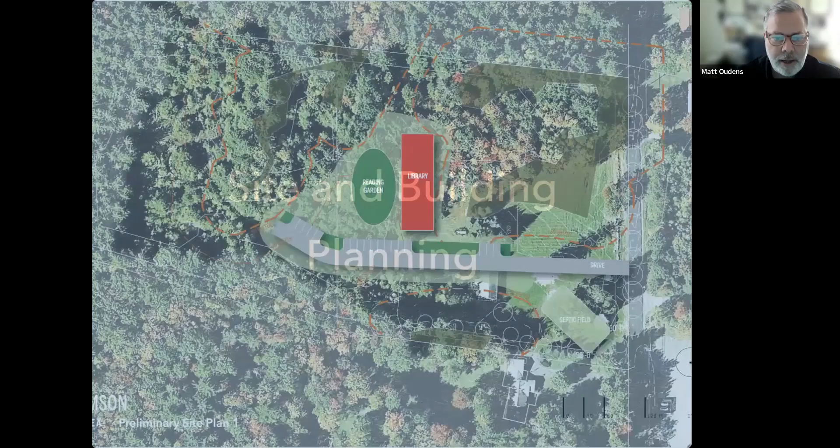As you both probably know, there are pretty extensive wetlands on the site. So the orange dashed line, the heavy dashed line, is the 50-foot buffer for the wetlands. We're trying to kind of thread the driveway and parking through that buffer. We have both east and west wetlands. So we're coming in using the existing entrance from Leverett Road with a new driveway that comes straight back with single loaded parking along it.

And the question from our standpoint really was about getting fire trucks back out once they're on the site, so we wanted to get a sense from the fire chief about what the preference is. The building in this location is about 350 feet back from the road - is that right, Dominic, roughly? That's right, yep. So it's a straight shot. In some jurisdictions the fire department has been willing to pull in and back out, but we wanted to hear from you guys what your thoughts are in terms of site access.

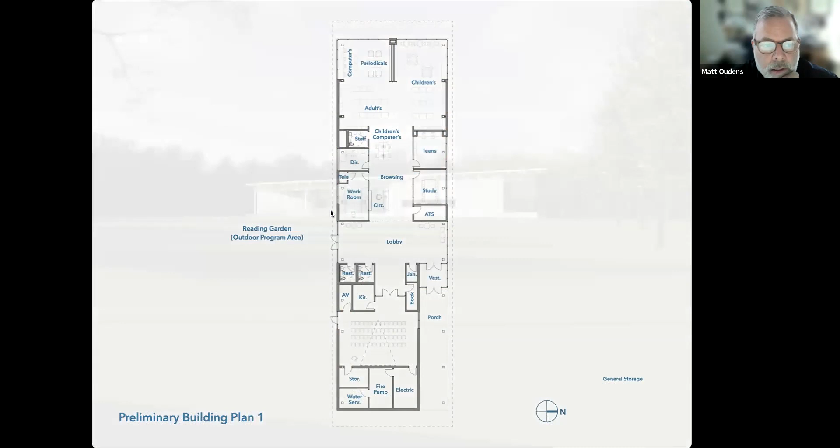That's also if we go with this scheme. We've got two other layouts, Matt - should we just quickly look at those? I don't know if we need to roll that far through. They're not going to be much shorter, maybe 100 feet shorter, but it's still - they're all kind of the same, you'll see them as we go through. If you want to flip to the other two, we can. Just get out of full screen mode and skip to that slide. There you go.

So if backing out is not acceptable, and we totally understand that, we need to come up with a solution that works for you guys in terms of how we turn a truck around. What we were hoping to avoid is a full turnaround, like a paved roundabout, a circle that allows you to fully do a forward loop and exit back out with the fire truck, just because it takes up so much room and means a lot of tree clearing. So alternatively, we could do a K-turn at the end of the drive, so you'd have to do a K-turn to get the truck out. We could also do something with reinforced turf - we've talked about a clear area that's lawn, but reinforced so it could support the weight of a fire truck. The challenge there is maintaining that during the winter.

So I guess we just want some feedback from you in terms of what you would like to see here. Would you guys be willing to do a K-turn at the end of the drive?

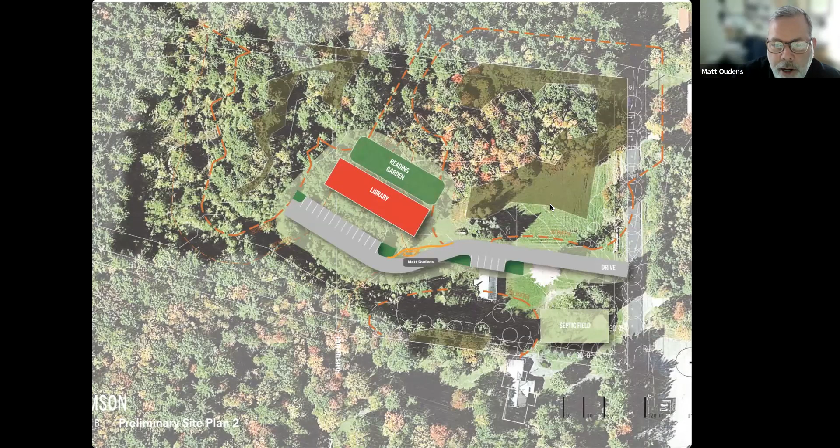So if we had, let's say, a drop off here, where anybody, patrons, whatever, could pull a car off, drop off to allow entry into the building. But that would also give a spot for a fire truck to pull over, which gives a little more room then to get another truck be able to get past in either direction. Would that be acceptable?

Yeah, that would work for me, in my mind. Okay, that way you can have one truck at the scene, one truck can pull in, turn, either go to the very end of the driveway and turn around and head out. That's pretty much what I'm thinking. That's kind of what has to happen.

Okay. And then in terms of at the end of the drive, what we've done in other jurisdictions, what I was describing is basically having a kind of hammerhead at the end. So a truck would pull in and then exit.

Hammerhead, I'm not following. Do you see the yellow I drew? Okay, yeah, basically enough to turn around there.

The alternative is that we're drawing a paved turnaround that's quite large to accommodate a turning radius for a fire truck, so it just takes up a lot of space. And actually you can see here that what I've drawn there is fully in the wetland, so we would have to figure out a way to do that kind of out here, somehow outside of the wetland buffer.

I'm certainly not trying to speak out of turn, Lenny, but I feel like if we're going to have one exit and entry point, even though there would be room around it, that straightaway looks more workable than the other. I wondered if there wasn't a point off the road where you could put an area for that truck to back up into and turn out.

I'm just looking at a straightaway with cars parked in the parking areas, and in that picture, I don't see any place to turn a truck around. I completely agree the space needs to be widened if we can, but as far as pulling trucks in and out, I like the straightaway better.

I'm certainly not trying to speak out of turn. I don't operate a fire truck, nor do I want to, but I've seen what these guys can do—they're really good at what they do in driving. So I do think there needs to be more space to maneuver around in that parking structure across from the buildings.

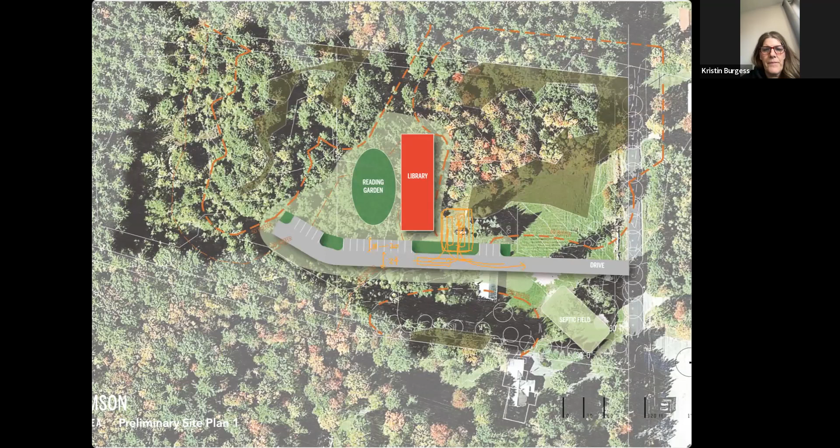Does that make sense? Yeah, so the parking stalls themselves are in the range of 18 to 20 feet deep standard, 9 feet wide, and the drive aisles should be about 24 feet wide. But so if cars are parked there, obviously you've only got 24 feet to work with.

I guess the question is what is this surface that we're driving on? Because it needs to be maintained during the winter, correct? It would need to be plowed. So it might need to be something other than reinforced turf if it's got to be maintained in the winter.

We'll have to review that with our landscape architect to see what they suggest, but it's possible we end up with something that's paved - maybe permeable pavers as opposed to asphalt. We can look at other options because I think we want to avoid asphalt, especially on both sides of the library. We don't want a library surrounded by asphalt. So we'll need to think about what that surface is.

But it sounds like, Lenny, you're saying you'd like to get a fire truck on both sides of this building? Well, I just kind of floated that as an option. I just don't know if you made that area wide enough for 2 fire trucks to park side by side - in real life that's just not going to work to be able to turn around. For 1 truck to turn around, they're going to be too tight together, unless it's really huge.

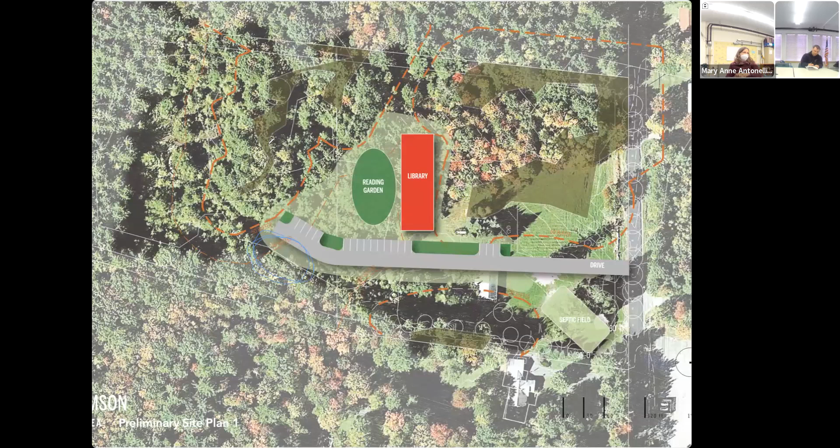But doesn't this also all depend on the orientation of the building? Yeah, and that has yet to be decided. So if you rotate the library and have it in that orientation that many people said last time they liked from the road, that might change the way that you access that space.

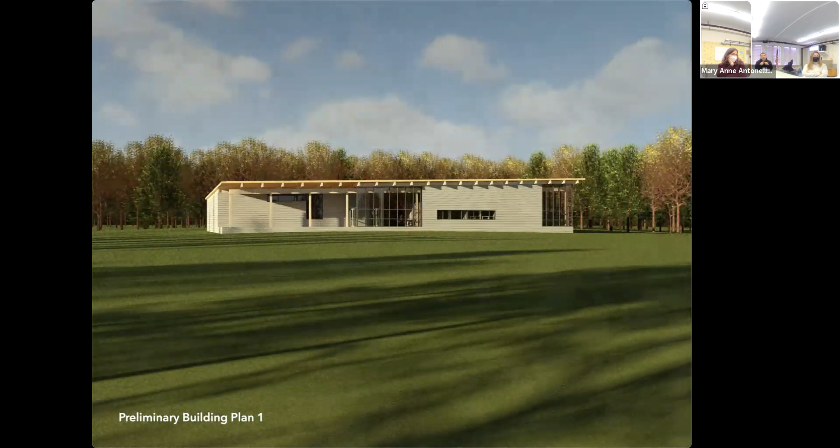As long as one truck can park next to the library and the other truck can pull in and then turn around easily and leave, that's pretty much all I want. And it looks big in these pictures, but it's really going to be like a big house, not like the elementary school.

I'm just wondering, why is the parking lot so far from the road? This is the way it's coming out? It's because the building has to be that far back from the road.

Just wondering, because if the parking lot was closer to the road, we could even get away with doing the work from the road like we would with the other library. Yeah, and it has to be that far back, because that dark green area, that's like a U shape - that's all wetlands, so we have to avoid that.

So Lily, I don't know if you've been hearing much of this, but I don't know if you have any thoughts from your perspective in terms of how we might manage some of this stuff.

It sounds like there are kind of 2 options. One is providing a paved turnaround at the end of parking somewhere - in this case, east of the end of the parking lot, outside of the buffer - presumably just a paved asphalt turnaround of sufficient radius to accommodate a truck of roughly 60 feet. Alternatively, we provide a couple of places for a truck to park and or back out, doing a kind of K-turn, which suggests maybe a different kind of paving.

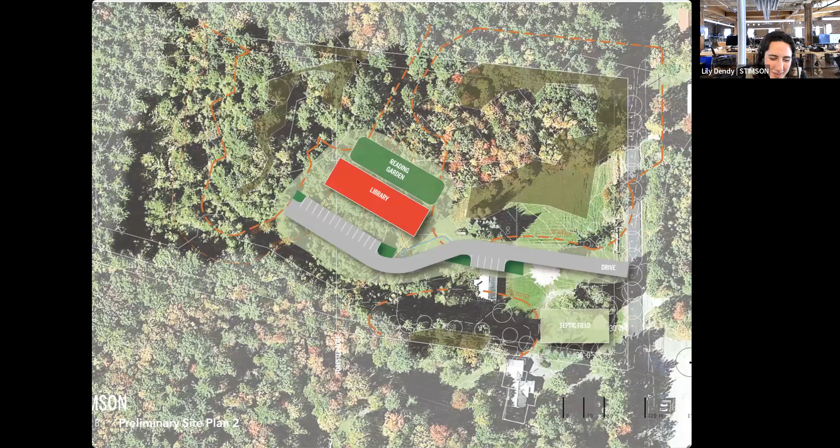It's snow that's the bigger question, because we'll have to keep it clear of snow, right? Lily, I don't know what your experience is with that. Is there a way to keep clear a reinforced turf area in the winter? I don't actually know, but I have a feeling Greg has a good understanding. I'll ask him. We're going to talk after this meeting.

So I think in the case of what Dominik drew there as a kind of lay-by, to me that makes more sense to do as asphalt and incorporate that into whatever scheme as a drop off for the library for patrons, and then have that available for kind of dedicated fire truck space in the event of an emergency. Chances are no cars are going to be able to park there, so it would be unlikely that there's a car there when an emergency vehicle is coming in.

And then in terms of exiting, I'm wondering if maybe rather than just a loop at the end, there's a way to have kind of a longer drive lane - I'm trying to draw it, this is not a very good drawing, but you get the general idea. Basically you're creating a longer loop out this way, Lily, if that makes sense. And then I'm thinking in the middle we could use that landscaped area - sorry, this is terrible, let me try again. We could use the area between that sort of loop drive and this area here as a bioretention area potentially.

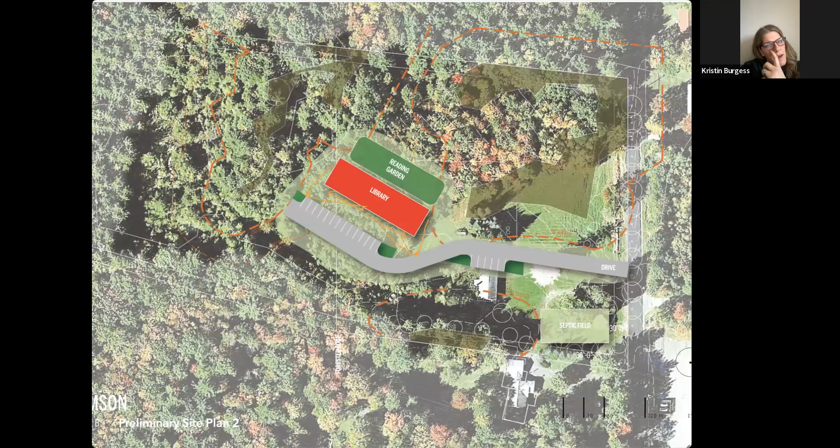Well, if I'm looking at the layout right now, I believe that the exterior building mounted cameras might catch certain things in the parking lot. I'm not as concerned about the parking lot. People that are coming there for true and positive reason are going to be careful with each other. And I believe the residents of Shutesbury are really good about, if they accidentally do something to someone else's property, to come forward. I'm mostly concerned of after hours, and people there for nefarious reasons. So I don't necessarily think that the pole mounted is necessary in regards to the parking lot. Of course, I yield to Mary Anne on that as well. I think that the building mounted cameras would be sufficient.

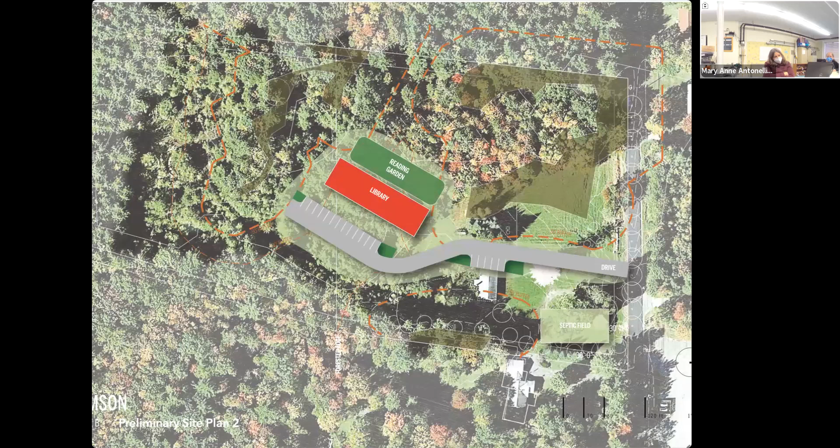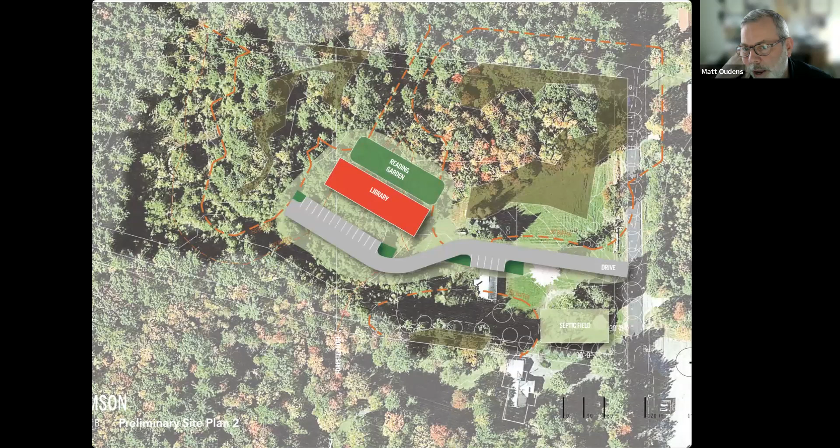So what do you think, Matt? I mean, generally speaking, we're trying to provide panic buttons usually where staff can access them and not the public. And that's why they tend to be at the circ desk, because there's usually somebody at the circ desk or close enough in terms of staff that it's easily accessible. If we were to locate them at the two ends of the building, then it's a little bit more complicated in terms of keeping them away from the public, but still easily accessed by staff.

Right, so maybe in the kitchenette, which I'm not saying would be closed off to the public, but would be mostly a staff location.

I just think maybe we could find a place to tuck one away at the other end. And if we can't, then, because we don't want people accidentally or intentionally hitting it. I could just tell myself that this is not going to be that big a building, and we're talking about moving 200 feet. So maybe the one. Yes, okay, we can have it just at the circ desk.

If we were to get two, I would say the conference room and the circ desk are the two most important spots. The conference room because when it's going to be utilized for conference purposes, you're going to have a large number of people in there. It is an area that if, God forbid, the library is taken over by someone who wants to do harm to a number of people, that is going to be the area that they will be enclosed in. So if we had two, those would be my spots.

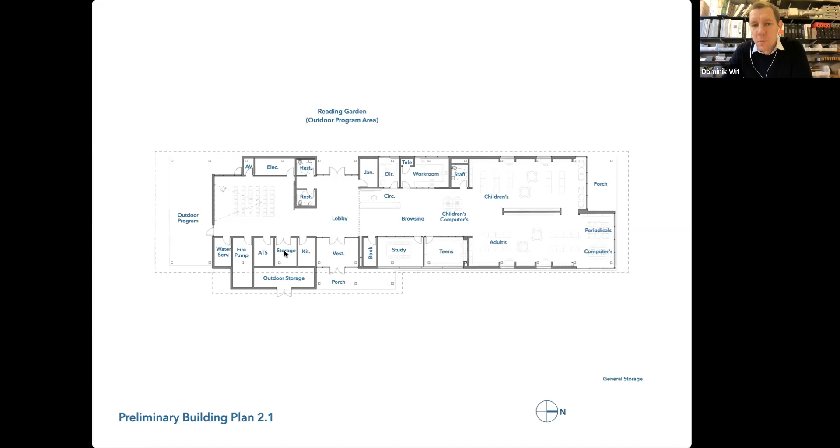The only reason is that anybody could just do it, so teenagers... we're probably not gonna have a lot of teenager shenanigans, but these things are always for that thing that you can't really plan for, and that is a rare occurrence anyway, but we live in a world where things do happen.

I do think having a staff member... you may not have a staff member in the room at that time. And if they're the only ones who know where it is - I'm a former high school teacher, so I've been through a lot of training, definitely not as much as you, Kristin - I just think of everything I had to think of to keep everyone as safe as possible, and the last thing I want to do is open a door when you're trying to get everybody out, to save as many lives, rather than trying to get into a room and push a button.

So I would just think about that a little bit more and see, when you're in that scenario, what would be the easiest way of calling. Behind the screen, or... the television, if there's all that.

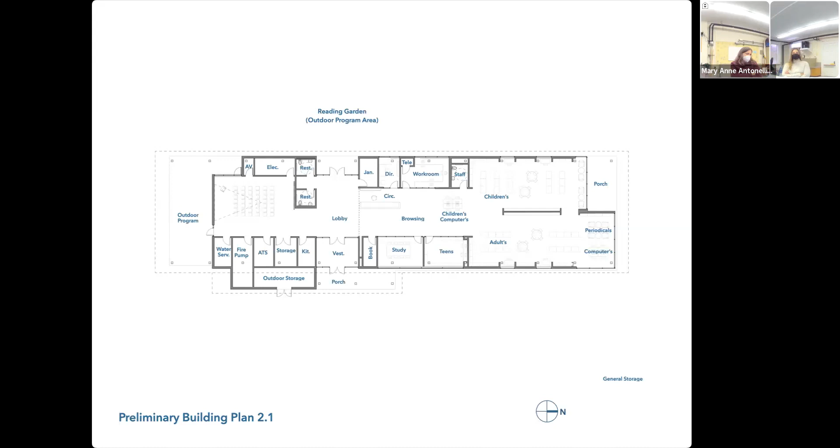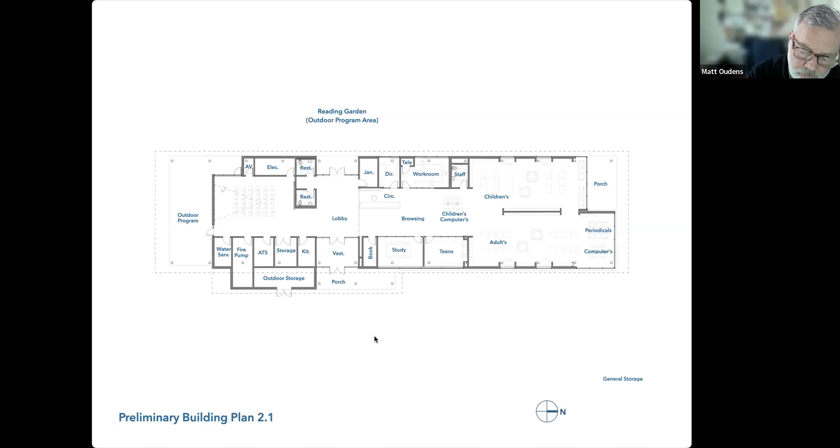Are you asking for procurement reasons, Neil? Yeah, more so, is this something we need to look at as proprietary? Or is this something that we're gonna purchase by state contract? And if by state contract, Matt needs to understand that we're providing pathway and infrastructure only. I'll see if they're on state contract.

So I don't think that we need to reinvent necessarily what we currently have. I know we've had problems with our Citizens Security in the past, and I know that Becky gets frustrated with them as well. But it only makes sense that if we have them for all the other buildings in town, including the school, that we would also have them for the library. I don't think we're trying to reinvent the panic button.

The camera situation - I know the school is looking into procuring cameras as well. Believe it or not, they don't have any currently, so we've been working on that. I'm not sure what they're planning to use. But as far as the panic alarms, as far as the building alarms, I'm going to agree with Mary Anne here. I think that we'll use citizens, and whatever panic system we have now works fine - we just need to put it in the right spot.

And is Citizens Security a monitoring company? It is. So each building - they don't physically do the install, they're just monitoring the signal? Oh no, they will do the install, yes, they will come out and install the security needs.

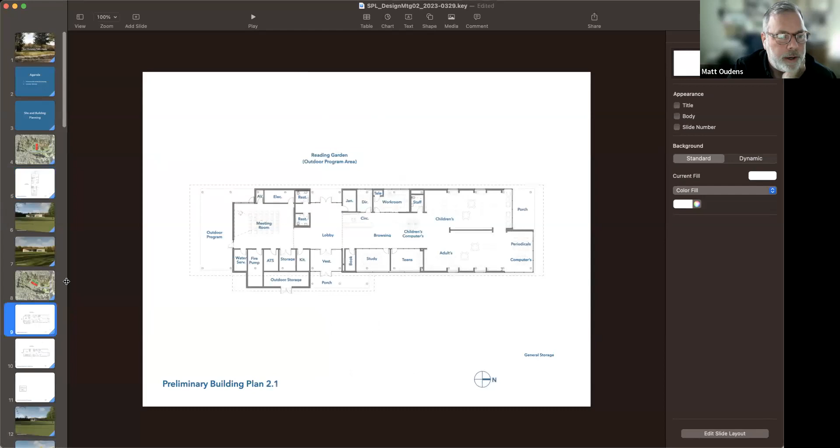Matt, are you still considering an attic space over part of the building for mechanical? We think that above the staff offices, the teen room, study room, some of those smaller spaces, we can create sufficient plenum space to locate mechanical equipment. Similarly, we might be able to get an ERV for the meeting room located above, say, the restrooms or the storage room and kitchen. So there are a couple of areas where I think we'll be able to get decent plenum space above to hide equipment.

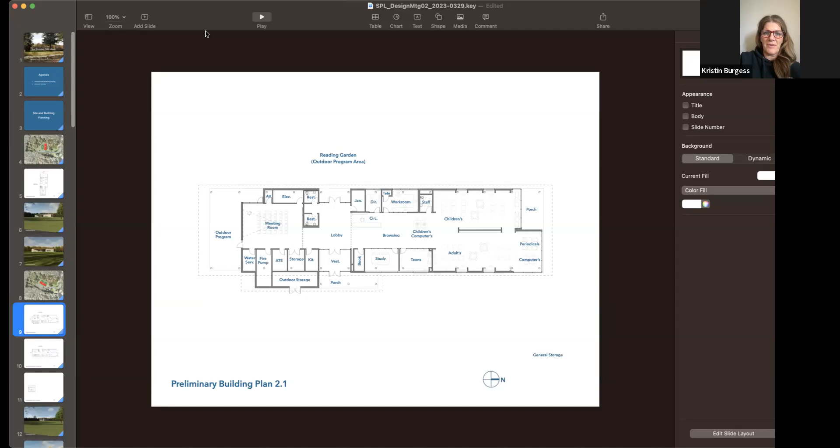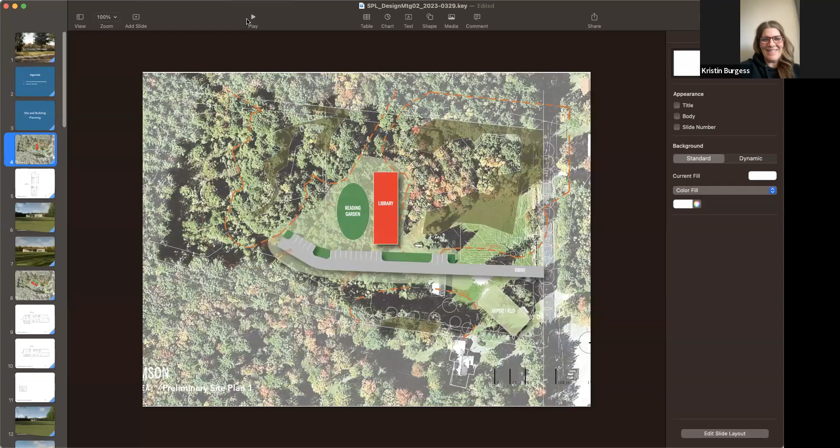Dominik, do you want to run through the plans as they stand today? Yeah, will do. I'm sorry, does anyone mind? I have something else I have to run into, is it okay if I'm excused? Yes, thank you so much, Kristin. It was really nice to be here. Thank you, Kristin. If you would send me anything in an email that you're showing after I leave, that'd be great. Marianne has my email. Yes, great, okay, thanks, Kristin.

That was really helpful, that discussion. Some of these images you've already seen. We've got 3 schemes that we wanted to review with you guys and go over the development of them. This is the first scheme where we orientate the building east-west on the site, and we're currently showing one option for parking. This allows for more direct access, breaks up some of the parking stalls, and introduces an option to incorporate some plantings and enhance the entry experience. The reading garden is located to the south of the building, and again we're considering the 50-foot buffers and trying to allow the building to have some address to Leverett Road to the north.

As we go to the next slide, we have a plan that's been revised slightly from what we've seen last week. It still has an entry porch on this side here to a vestibule and a central lobby. Dominik, we're still not seeing the site plan. Got it, there you go. Something with the play seems to not register. Can you all see that now? Yes. So with this plan, entry is through this overhead covered porch into a vestibule.

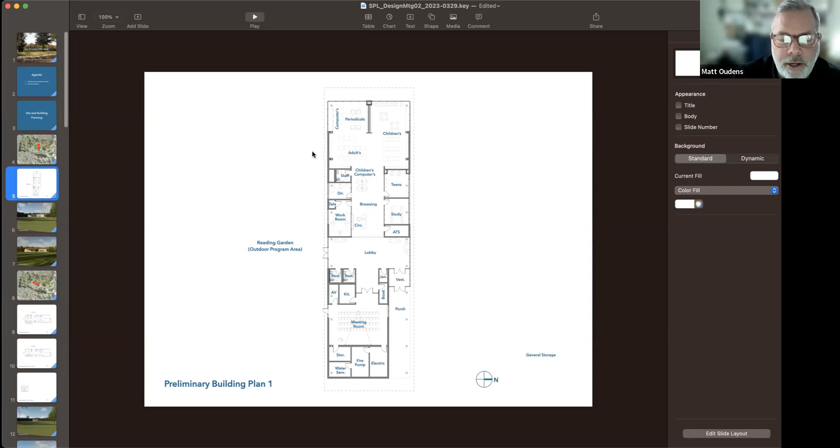Hey Dominik, I think we're not seeing it in full screen mode, so your cursor is kind of misaligned. Got it. I think I'll just stay in this - if that's okay with everybody, is this a lot easier for everybody to see? I was able to zoom in now. Does this work, Matt? Yep.

So I'm just highlighting this mechanical space here. Apologies for this. Here we have the meeting storage room. We have water service fire pump, which needs exterior access or needs to be on an exterior wall. We have the electric room as well. Then the kitchen, AV rooms, and the book drop create this threshold for the meeting room. We've located the public restrooms in this lobby.

Access to the book drop room, which needs an exterior wall, and then we have a janitor's closet. So we did follow up with our code consultant as to the requirement for restrooms.

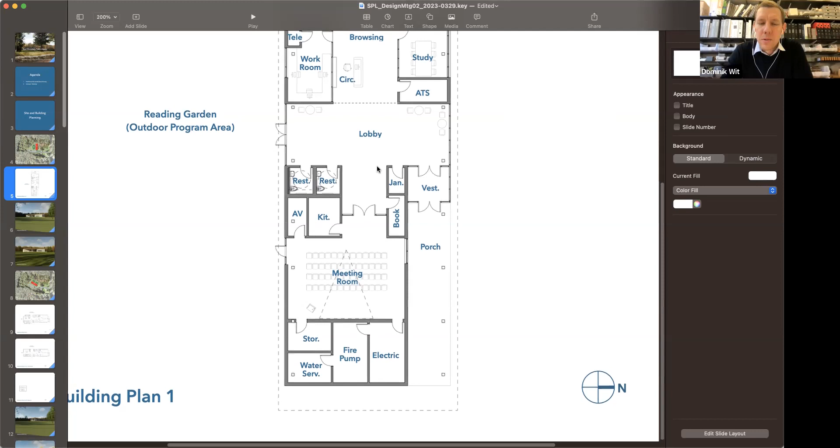If we had less than 100 patrons, we would not need a third restroom. But following our discussions at the last meeting, we've included a staff/family room—it can be considered for staff and patrons—allowing for a third restroom, which we've included in all three schemes. I wanted to note that as I'm talking about these two gender neutral restrooms here in the lobby.

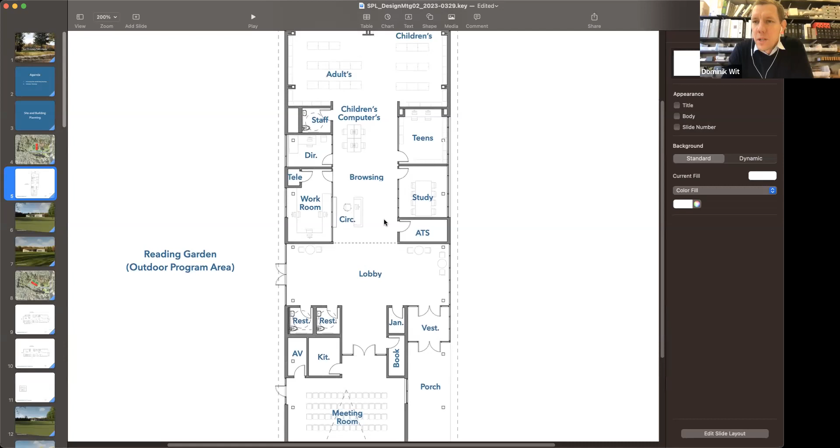Marianne, feel free to jump in as I'm presenting if you have a question.

I think the likelihood that we would have 100 people in this building at any one time, that's going to be rare. Before the pandemic, we would have 30 to 40 people come through a day. Programming would be happening in this building, and we might have 50 people on a somewhat regular basis, but to have 100 people in the building on a somewhat regular basis, I think that's not a reasonable expectation.

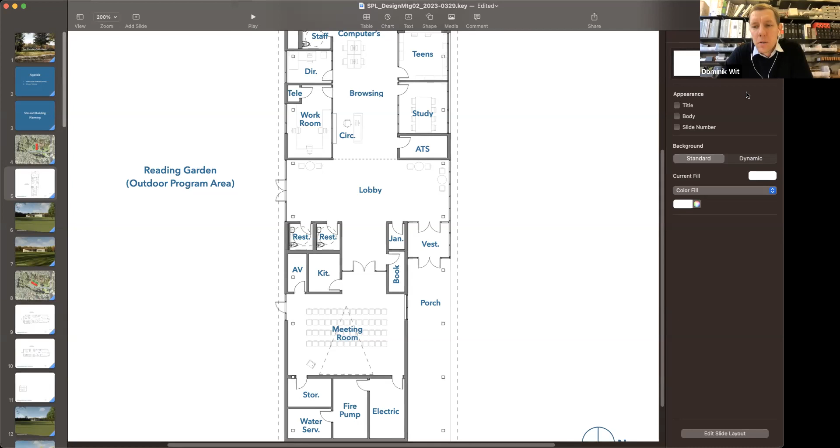So if we said that we were going to have 75 people, do we have to have that third restroom? We would not. But I think that would require sign off from the local official, Marianne.

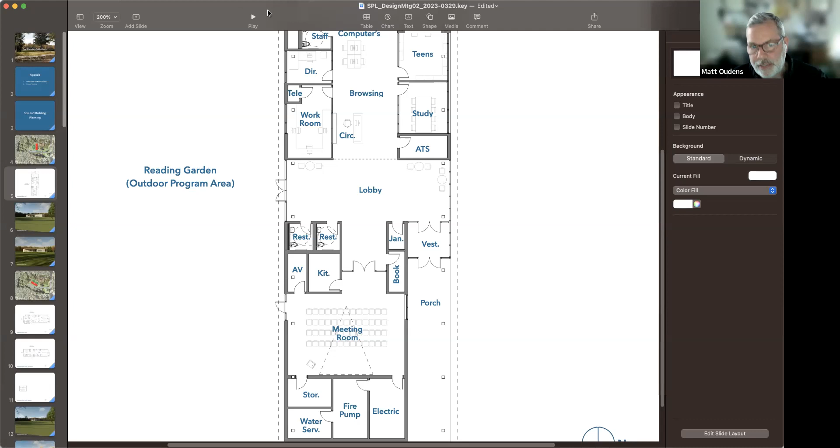I think you would probably have to do something like either post maximum occupancy in the building or sign an MOU with the local authority, basically saying that the occupant load would never exceed that capacity, because otherwise, if you do it based on building area, you're going to exceed 100 people very quickly.

We were basing occupant load for fixture count on seating. If you have a 50-person event and other people in the building, and you count up the total seats, that's generally how we

estimate fixtures. I understand what you're saying, but I think it's conceivable, although you're saying it's unlikely, that you would have more people. So I think we would just need to get sign off from the building inspector that that's an acceptable interpretation.

And I don't think we can base anticipated building use on the use that you have in the past. No, but this is a town of 1,800 people. The Irving Library just had a day when 100 people came into the library, but they weren't all there at once. I think we'll have days when 100 people are there all at once, but those are going to be the rare occasion.

What's the capacity of the meeting room? It's 50. Are you taking into account, like, if the bookcases were bolted to the floor, would that lower the occupancy? Or are you taking the occupancy with all the bookcases for the books or without it?

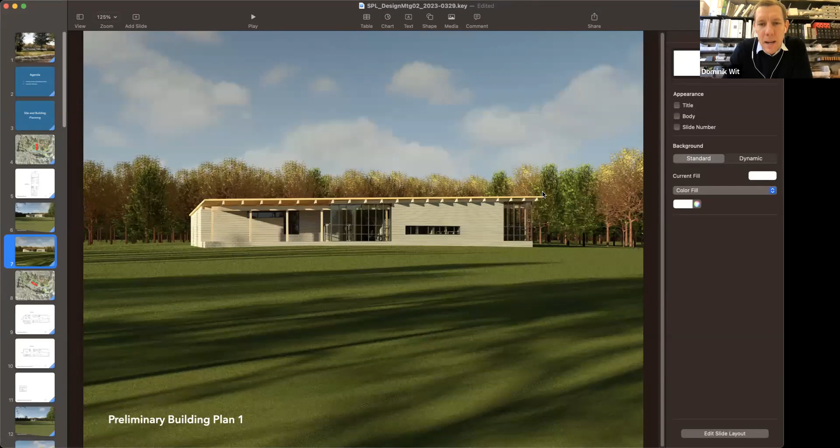Again, similar to the previous view, a bit of a different angle. It highlights the roof angle, which we have to allow for PV, maximum exposure of photovoltaics on roof. And the one thing to point out, the grading obviously needs to be adjusted in the model, but right now that porch is sitting up above grade, but actually that would sit right at grade.

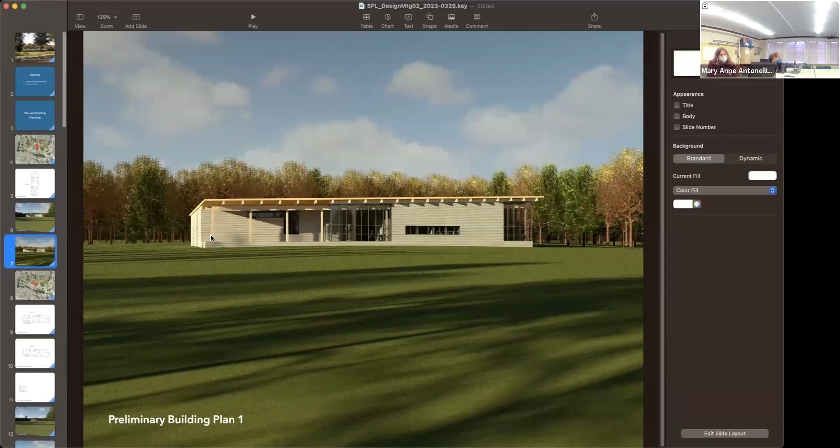Right. And can you tell me the dimensions of the porch? Currently, we are looking at 45 feet that way, and then how wide? 12 feet. Well, yeah, okay.

So one thing related to that to mention, I mentioned earlier that we are looking into the possibility of a small basement for mechanical space, and we want to price that as an option at a schematic level, probably for whatever scheme we end up pursuing. But taking this one as an example, if we were to create a basement, that whole end of the building at the bottom of the page could go down into a basement, which would shorten the length of that porch by a bay.

So what is that, 15 feet, Dominik? I don't know. That's correct, so it would shorten the length of the building. It would reduce the exterior envelope, it would reduce roofing, and potentially it would reduce the length of that porch, which I think might be an advantage.

The other thing is we could maybe flip some of the AV and kitchen to the back side of the meeting room so we don't have such a deep threshold between lobby and meeting room, which is a bit of a challenge in this scheme. Mary Ange, I know you're hoping for some connection between the two, and that's difficult to achieve here because of everything happening between the meeting room and the lobby.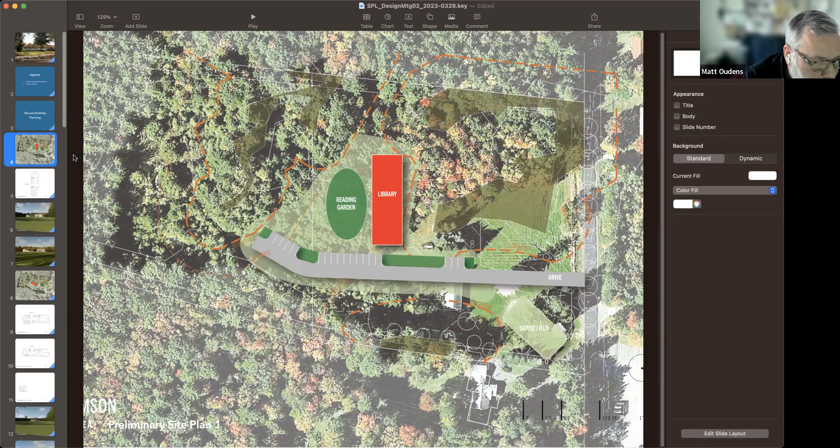Where's our outdoor covered program area? So we don't have that in this scheme. Really the only way to create it, Dominic, if you can go back to the plan, would be to tab out this roof at the end so that we don't need such a deep overhang on the end of the building.

So the roof would sort of be doing this, with a constant slope down to here, and we'd have to support that roof here and here. I think that's probably the only way to do it, unless it's a separate roof structure adjacent to the building, which is another possibility.

We could have that covered outdoor area as a kind of freestanding pavilion, with a canopy connection at the door that gives you cover to get in and out. If we did it this way, we could make it unsprinklered since it wouldn't be attached to the building. But if it's not attached to the building, it's not an eligible cost, so it has to be attached if you want us to pay for it.

So couldn't- yeah, and the porch, that's how we have it in the other two schemes. Couldn't the porch just be bigger? The porch could be bigger, it's almost big enough.

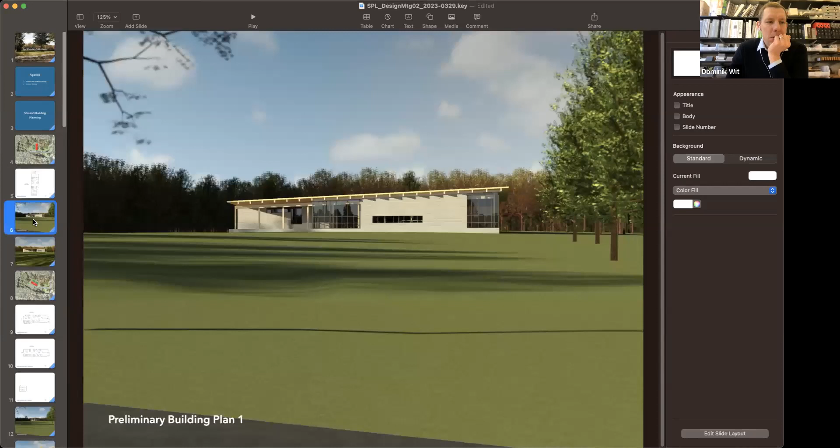So here we wanted to show you two schemes for this. Again, as Matt said, we're considering a basement for all three as that's in play, and we'd like to use this scheme to explore that. This is scheme 2, so it's north-south or at a pivoted angle. Entry is more central to the building with a small uncovered porch. In this scheme we're considering outdoor storage, with direct access to parking or close proximity.

Entry vestibule into the lobby, again with glazed conditions on this plan up and down. You have the meeting room to the left. This threshold condition we're looking at a little differently, and I think what's nice about this scheme is we've allowed for a better relationship between the meeting room and a spill-out space before you go into the meeting room. We've broken up the two restrooms to create more private access - you could consider a drink fountain here - allowing access to these restrooms to be a little more remote from the lobby, not directly off of it.

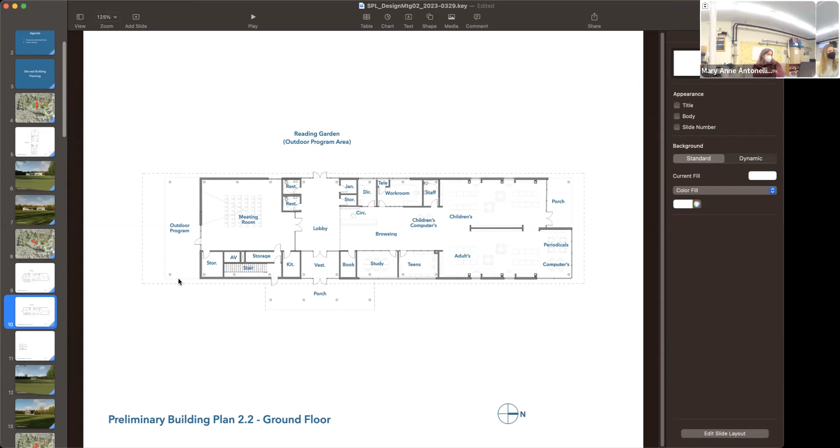This was the scheme with the basement. We can move on to scheme 3 if you'd like.

I think those restrooms are much better, that configuration. And to Stephen's earlier comment, which he's totally right about, the previous lobby provides these little eddies of space that allow for seating, which is harder to imagine this lobby creating, although I think we could make some modifications to allow that. It was a good point to bring up to make sure we're thinking about seating opportunities in the lobby space. We're imagining there will be some mobile book display units in there as well, but we want to think about seating in addition to that.

Oh, that looks fabulous. So this is a view again from Leverett Road. You're seeing the sloping roof picking up on the photovoltaic array there, and here the study vestibule kind of openings within this solid. It's a nice way of controlling light while allowing views through, giving us the perimeter wall shelving. We've incorporated this solid wall, which divides the two programs, left and right, adults and children's, which allows for kind of a porch condition and a nice interplay on this facade.

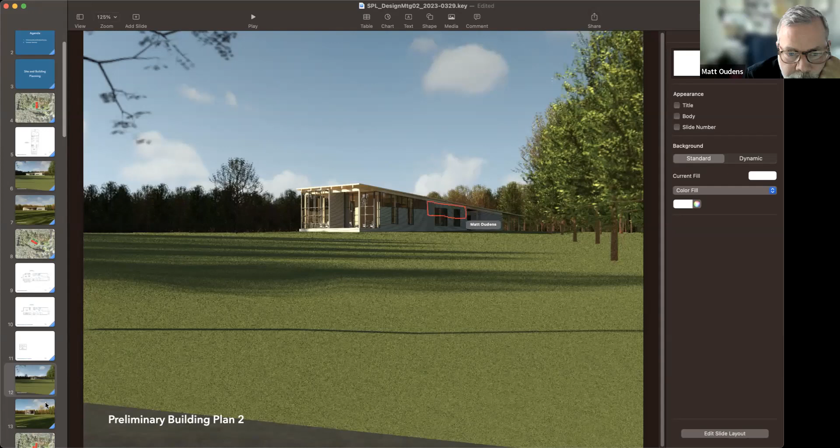So to Lauren's comment earlier, the mechanical space would be here, so these windows would have to be lower. But we're thinking that whole space above that middle zone would be available for mechanical units.

What is that dimension on the height at the highest end? About 18, underside of structure. Much higher than that. I would love to have some figure or something to give scale to this, because it's really hard to understand the scale of it.

This mullion you see here would be around the top of a door condition if we were to have a door. Okay, yeah, that's pretty close, three times.

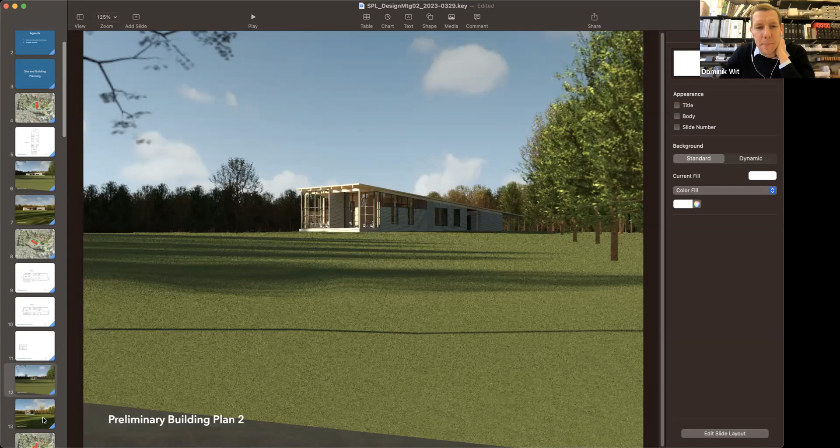This is a view located on the entry drive, or estimated entry drive condition. So again, you would really see through these large reading rooms, adults and children's, and that would be activated, giving a nice presence on the arrival sequence. Again, we have the roof at its tallest condition facing Leverett Road, which I think is nice, both from views from Leverett and the experience to the building. And the views out of these spaces to the meadows is great as well.

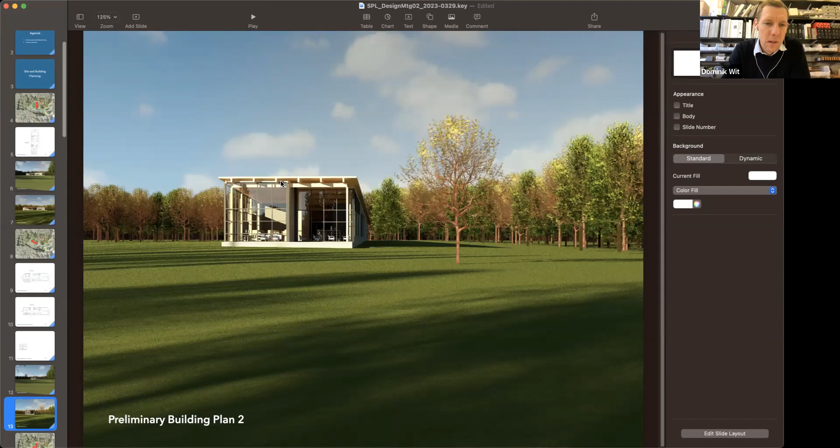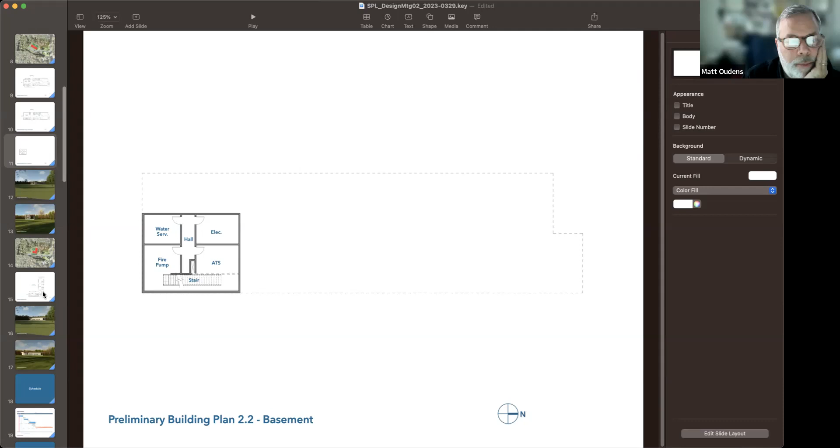We don't know yet if this is worth pursuing. We haven't been able to get into this yet with our cost estimator to get a better sense from him. We had an initial communication with him, and he said that in theory, it's conceivable it would just be a wash, that by reducing the above-ground enclosure and spending a little more on foundations and a small basement, it's about a 1-to-1 trade-off. But we haven't talked to our engineers about it yet, or had a more in-depth conversation with our estimator.

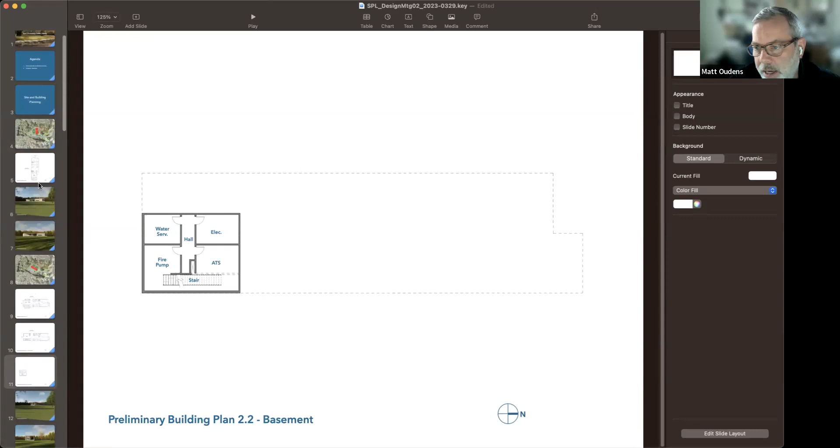I think we're still grappling with the plan. The reason we were thinking about a basement is because it freed up room on the main level to get spaces closer together without all these ancillary spaces getting in the way. We saw that most in that first scheme. It's a little less of a problem in the second scheme, and the third scheme probably has the best relationship between lobby and meeting room, because everything else is side-loaded. So maybe there's a way to manage it, like in this scheme, where it would be a cleaner plan if we could move a lot of that back-of-house stuff down into a basement. But we're still hopeful we can figure out a way to manage it all as slab on grade, and that's something we're still working through in all of them.

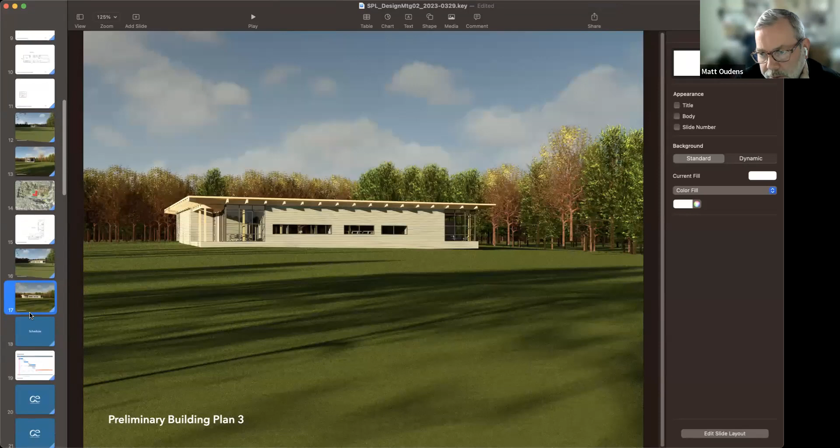Theoretically these are all the same program, but an L-shaped building adds a slightly more complicated foundation, because it's L-shaped instead of just a rectangle. It introduces a valley beam, which adds a bit more structural complexity. Not that it's all that complex, but it's more than just a straight run of structure with roof joists that are all the same. So I think those are really the premiums here.

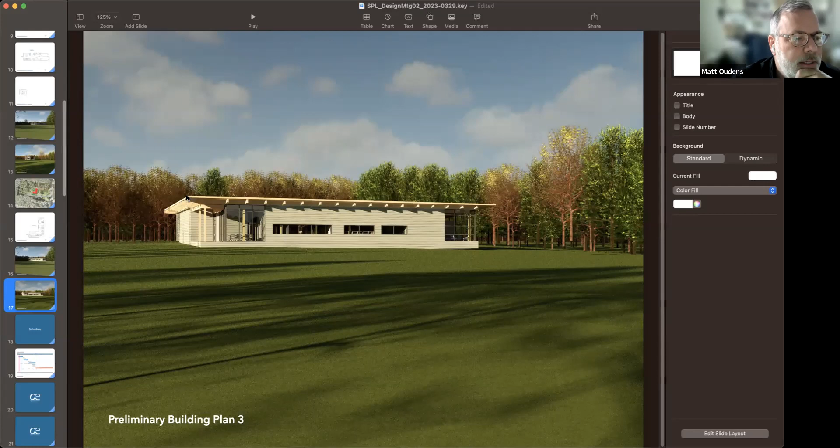There's probably, Dominic, is this a slightly narrower or shorter span? It is, yeah, so there's maybe a little more perimeter here. Actually, there's definitely more perimeter in this one — it's just the wings are a little bit slimmer. So for the same square footage, we probably have more exterior envelope. I'd say those are kind of the three things that are a premium with this organization.

What's nice about this one is that the building starts to shape outdoor space. I think the meeting room, lobby, outdoor program space sequence works pretty well in this one. The children's room is a little more awkward here than in the others, because you're moving through it to get to the other one, whereas in the previous two schemes you're moving through the central core, circulation and staff spaces and teen room, and then going either left or right into children or adults — they're parallel rather than moving through one to get to the other.

I don't know what your view is about that, but to me that seems less ideal. Agreed.

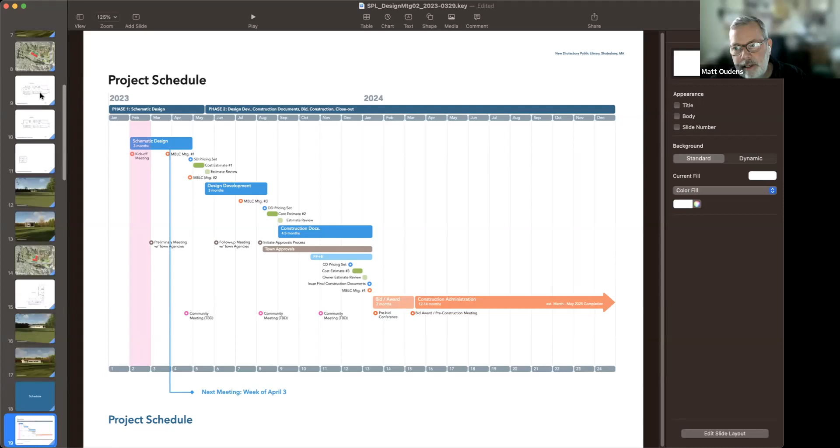For a couple of reasons. One, I like entering into the middle of the building rather than the end, so there's a more immediate experience coming from parking into the long side of the building and arriving at the lobby. It's a shorter transition from outside to inside, and you're there in the middle, and you either go left or right. I think having the children and adults paired at the far end works pretty well. There's not a bad connection between the meeting room and the lobby. I think we could work on improving that, perhaps. Right now it's the restrooms that are kind of the one thing left between them, but it's a pretty generous opening.

Yeah, can I make a suggestion? You're gonna hate it, but I have to say it now because it's in my head. So we enter from the side that says porch, and we have double doors and glazing, the same on both sides, on the entrance and then the exit to the reading garden on the other side. Actually, I'm not gonna say it. I've already convinced myself. Don't worry, you don't have to convince me.

All right, so what I was gonna say was, can we just have a single door there? And Lauren's over here poking me with a hot poker. I don't know why anybody gave her that hot poker. It was kind of a mean thing to do. And I was gonna have the two restrooms next to each other on that back wall. But that's not gonna work.

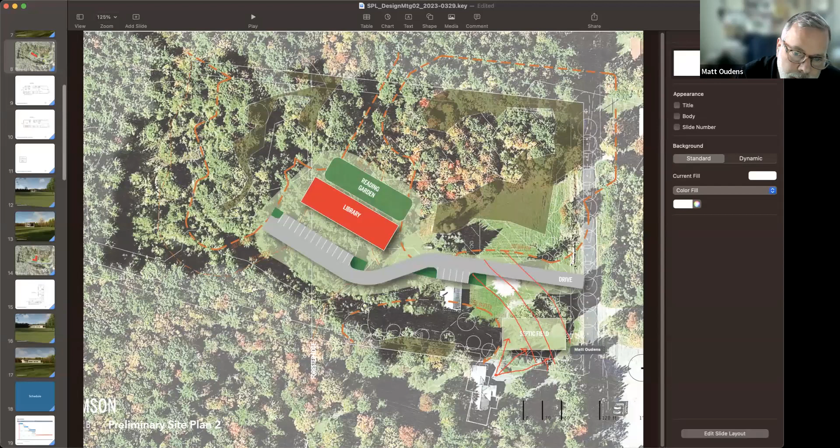We also know that the grade is going this way, downhill. So it probably makes the most sense for septic to orient this way, if you can see that on the screen, so that it's following the natural grade. It's going to sit above natural grade, obviously.

So if you were to draw a kind of exaggerated section, if this is grade, your trenches are here, and there's lawn above it. This is exaggerated, but you have fill all above this line of natural grade, so the dimension down at this end is much shallower than the dimension at this end, as the grade falls away from you.

This has to be level. The top of it has to be level. So you're putting a flat plane on top of a sloping plane.

From that standpoint, from the neighbor, this is going to be pretty easy to manage. We'll berm up to that sort of plateau, and this is going to be planted on top, whether it's lawn or meadow mix or community garden plots, whatever it is, it's going to be vegetated, the top of that septic field.

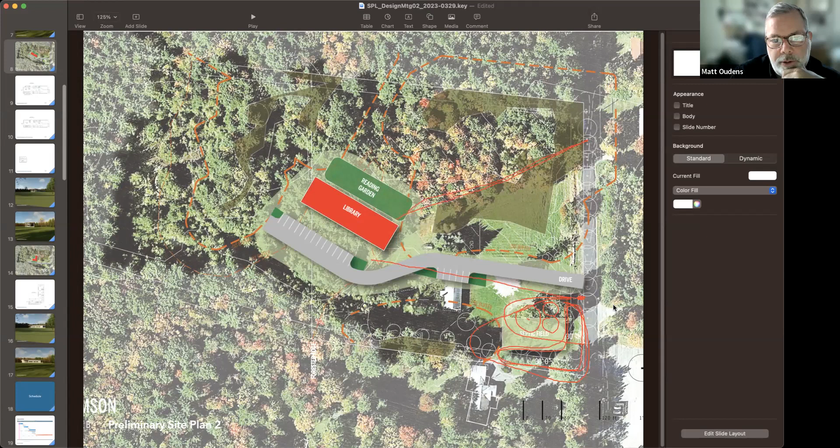So this is kind of the open corridor there, which is the sort of existing wooded edge, and then kind of here along the driveway effectively.

Any other comments about the plans or preferences from you guys?

I'm still liking schemes 1 and 2 for further development. I'm not as big a fan of 3. With scheme 2, I like that you cocked it around a little bit, because it bothered me that only a small elevation of the building was facing the road, and now we have a little bit more to see when you drive by. I also like entering the building in the middle with scheme 2. But with scheme 1, I don't really mind that long entrance porch - I think it could be used wisely. Every other issue I had, Matt, you already talked about when it came to the plans, so I'm satisfied with what I'm seeing.

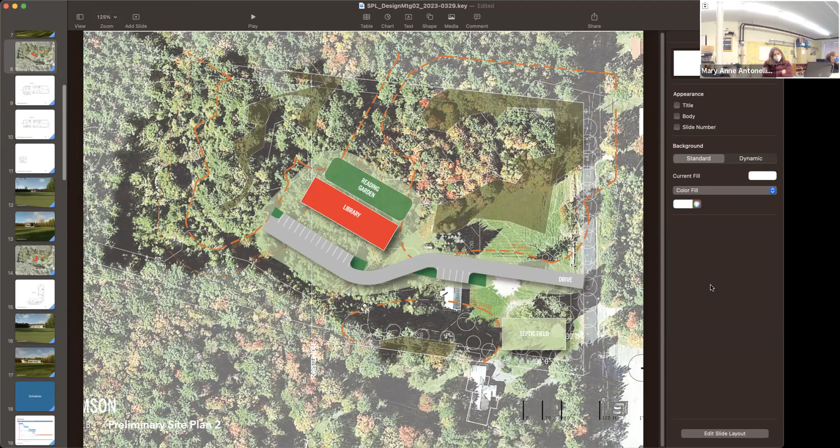I really like scheme 2. I wasn't interested in scheme 3 at all until today, but I like the wider scheme in scheme 2, and I really like how scheme 2 looks from the road. So I'm encouraged, but not so encouraged that I don't have more complaints.

I'm curious, Mary Anne, what it is about option 3 that you like. I like the lobby to meeting room to outdoor program area - those double doors that lead to the outdoor program area really appeal to me.

And then, if it wasn't going to be more expensive, what I'd like to see with this scheme is to make the bar with the library proper program areas wider, so you get that same effect as in scheme 2 of having the adults and children beside each other. It could be wider but shorter, and accomplish that same thing with this L-shaped bar. But if that's going to be more expensive to build, then - remember, money is always on my mind.

That's why I asked when somebody said this was narrower. So if it were wider and shorter, we could have that same effect as in scheme 2, with the adult program area on one side, the children on the other, separated by a wall possibly, and still have this layout with the lobby, meeting room, and outdoor program area.

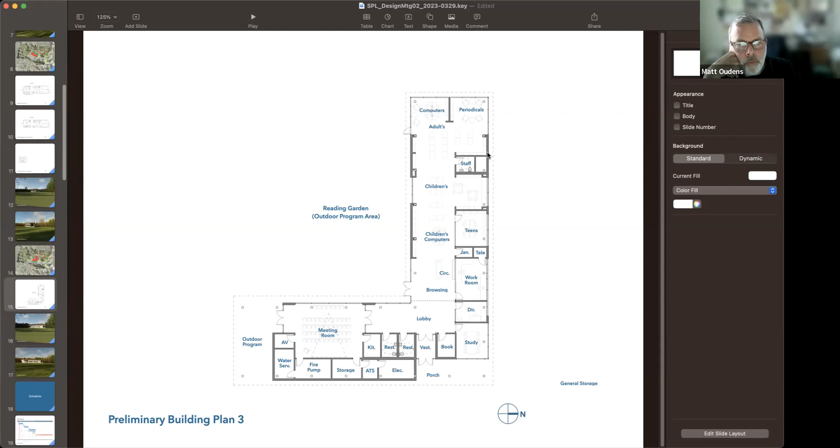I'm not worried about the reading garden. I've spent a lot of time on Lot 032, traipsing around with environmental professionals, and we did some programming there last spring and summer, and you can be sitting even much closer to the road in that meadow and really feel like you're out in a rural setting. So I think the reading garden in any of the locations is going to feel nestled into the environment.

So it's not that, it's more that - but as far as structure and stuff goes, that's all up to you. I don't know where the columns are going to go and how many rooms. So option 3, you like from a plan standpoint the relationship of lobby to meeting room to outdoor space, would prefer the main wing to be wider like the others, so it accommodates the program in a similar way.

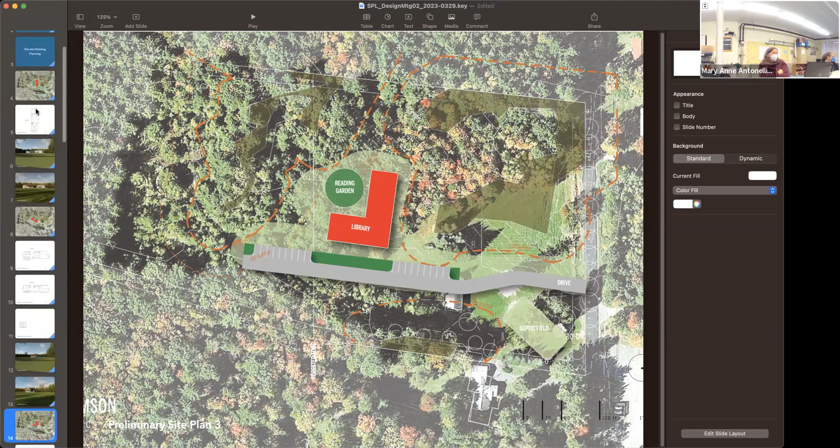That's clear. And option 1 for you? Option 1 is fine, but not exciting - option 2 is more dynamic and exciting. I like if that porch could be bigger and do double duty as entryway porch and outdoor program space. I think you could have double doors on the side of that meeting room out to that porch if you wanted. I'm not thrilled about the long hallway into the lobby, but maybe if I whine and complain about it enough, you'll find a way to change that. It's my only strategy - whining and complaining.

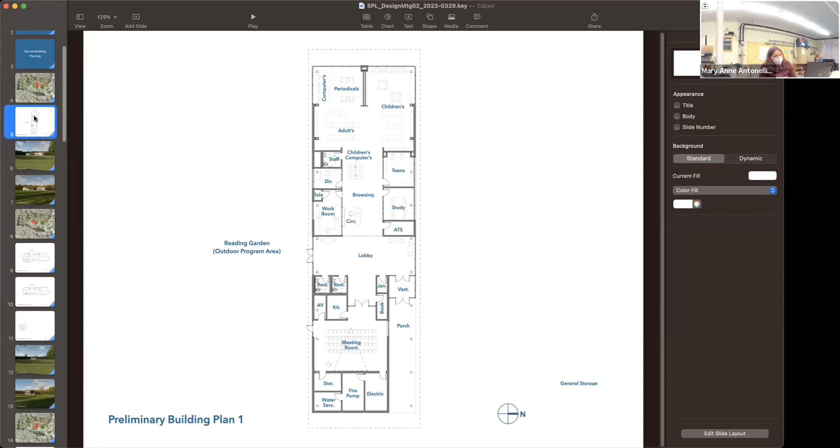So that's that. The one thing in scheme 2 that I'm going to erase is that extra little porch on the end. I love that scheme 2's got the meeting room to the outdoor program area - that could be double doors going out there very easily, and it's a larger opening to the lobby. But we're just going to erase that little extra porch on the end. As much as I love it and could imagine sitting out there as an old lady, we have to shave that off to save some money.

You mean the one off the children's room? Yeah, that one.

Mary Anne has to ruin everything.

But I mean, this is pretty close. What's missing? General storage. We'll just throw stuff out and we won't buy anything. I think this is close. Yeah, I would spend the most time working on this one.

Lauren and Andrea, how about you guys from your perspective? I agree. All of the schemes have pluses and minuses, but I think the second scheme has most of what we want. I think it works the best.

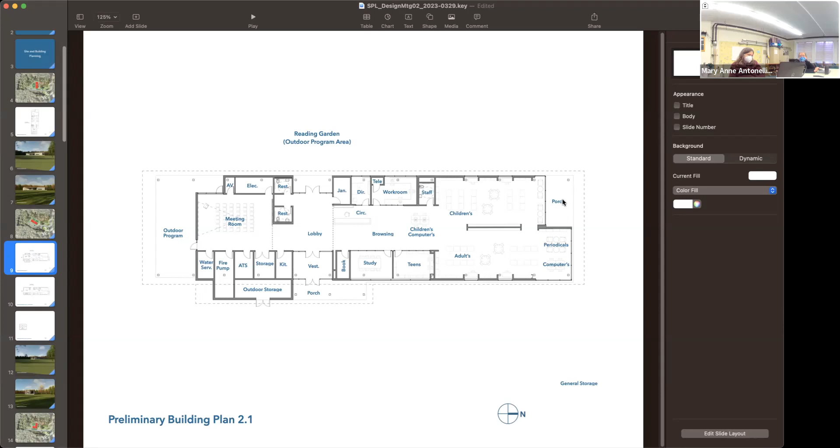I'm still concerned about acoustics between children and adults, but in a building of this size, I don't really think we can avoid it. We can't isolate those from one another. I think using shelving as a sort of visual partition is a good strategy there. Okay, I like 2. What do you think, Andrea? I think 2 is the best.

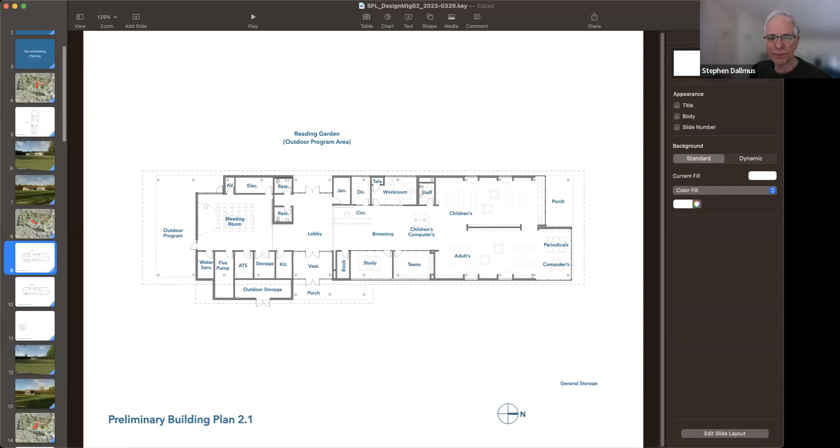If I can, Stephen. Well, I think the biggest problem in my mind with scheme 3 is its visual presence from the road. Yeah, I agree. And I think scheme 2, having the long roof pitch and the look that you get from the road, it's a very elegant looking building.

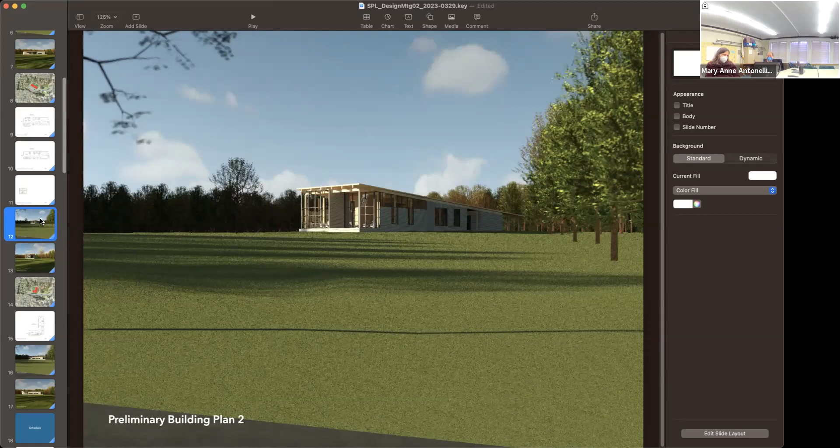And I think that you've really resolved a lot of the issues with the plan. And with some, as you continue to beat it to death, I think you can make it even better and get closer to 5,500 square feet. I just think, from my perspective, this is the scheme to go with and just really work on.

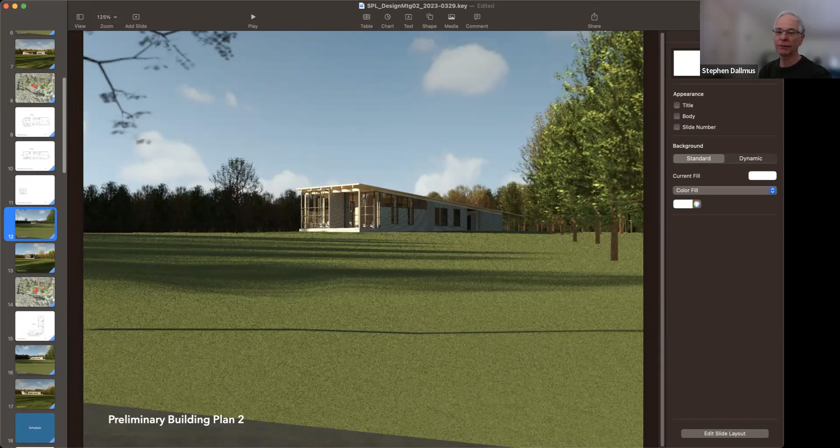It provides a very nice buffer between the parking area and the area that'll be the reading garden without being an L-shaped building. And with the planting that's already existing and being able to see through the building as you come in back to that reading garden, I can imagine people out there, in cold weather, just because it'll be such an inviting space.

As long as somebody shovels the snow. But I think that has a lot of positives going for it, and it's worth really looking at closely.